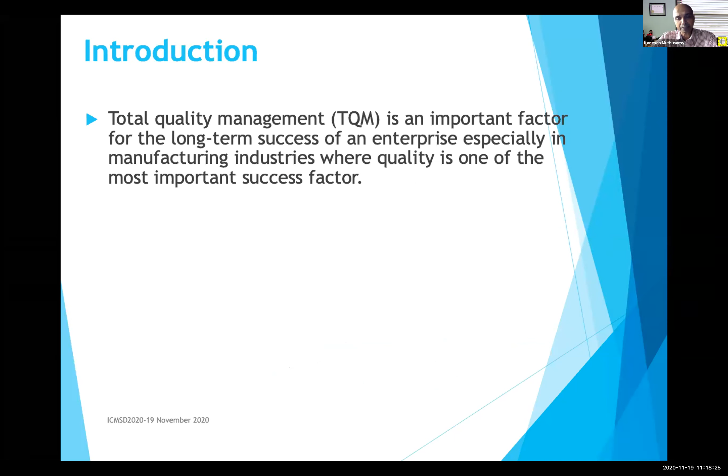As all of us already know, total quality management is an important factor for long-term success of an enterprise, especially in manufacturing industries, where quality is one of the most important success factors. Without quality, it is very difficult for us to sustain in the industry. This keynote talk attempts to present a list of TQM principles adopted by various enterprises for their operations excellence. These elements can be undertaken by any manufacturing organization striving for excellence. If you want to achieve excellence, then we have to adopt some form of total quality management.

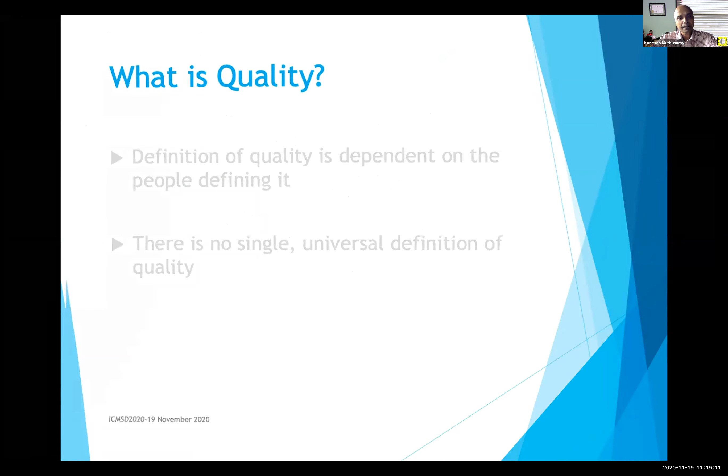Before we proceed, we must understand what is quality. Quality is not something that can easily be defined because it depends on the people who are defining it. There's no single or universal definition of quality. And there are 5 ways we can define quality. Number 1 is conformance to specification.

When we talk about materials, even manufacturing, we have a lot of specifications. So if a customer wants to accept our product, he has given certain specs. So it has to conform to the specification. Does the product or service meet targets and tolerances defined by the designers? Because it will be in the drawings. So that's a form of quality definition.

Another quality definition will be fitness for use. It evaluates the performance for intended use. For example, we compare a car, maybe Maruti and BMW. Both move a person from A to B destination. But the price will be different. But it is fitness for use. It serves the purpose. So if we have a little money, then we go for Maruti, and if we have a lot of money, we can go for BMW.

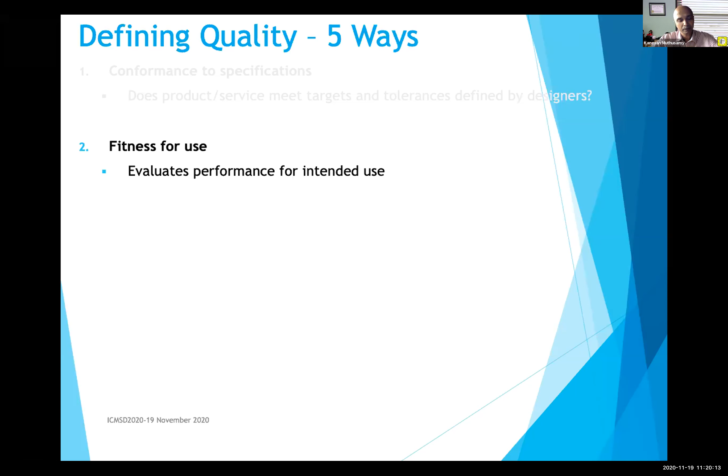Value for the price paid. We can evaluate the usefulness versus price paid. In my example of BMW and Maruti, we can see that we can pay a higher price for the same value of traveling. But in terms of comfort and elegance, of course, the BMW will be different to us.

Support and services we can also measure as a form of quality measurement, where it is the quality of support after sales. Normally people will look at the after-sales service, whether we are getting the right service after we acquire the system or the item. And that will determine the quality of the product.

And finally, psychological: the ambience, the prestige, the friendly staff. You know, when you go to any car showroom, the way they present themselves will give us some kind of psychological influence in terms of the quality of that particular product that we're going to acquire.

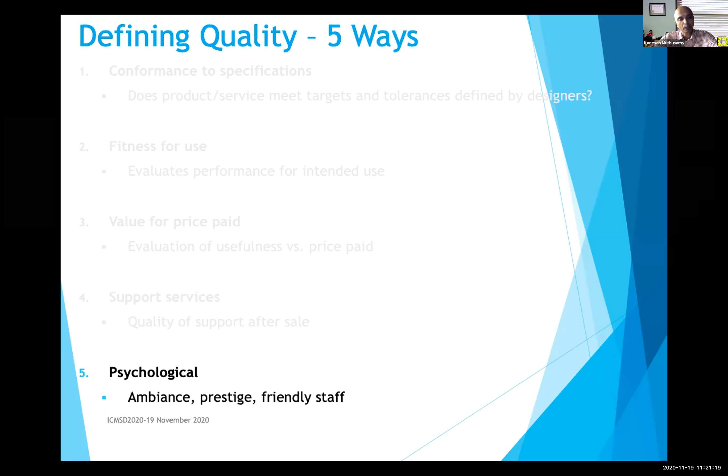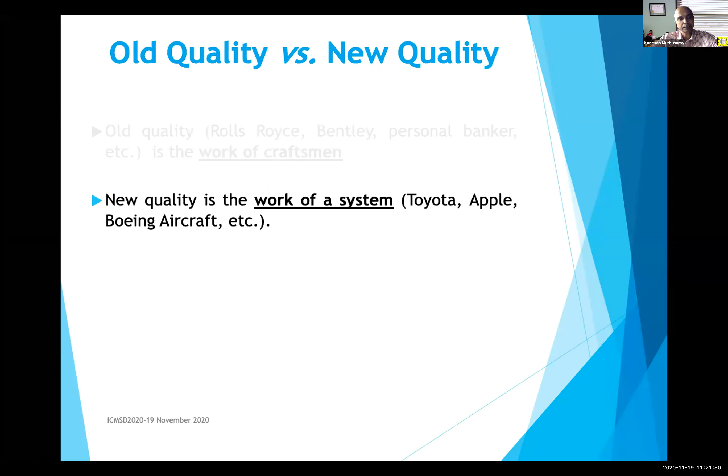We can compare the old ways of quality and new quality. The old quality, for example, like Rolls-Royce, Bentley, or a personal banker, is the work of craftsmen. They're very specialized. The new quality is the work of a system, like Toyota, Apple, or Boeing aircraft. They adopt the new quality as the work of a system. The beauty of the old is very expensive, made for the few, uses skilled hands, and is beautifully and functionally based, which is difficult to reach all the people.

Whereas the new quality reduces cost, is made for the many by intelligent minds, and should drive the economy and make business more competitive. For example, our previous guests talked about producing materials which are cost effective and can be used by various industries. And this can only be done by the new quality, not by old quality. Old quality only caters for the few because it is custom and will be very expensive.

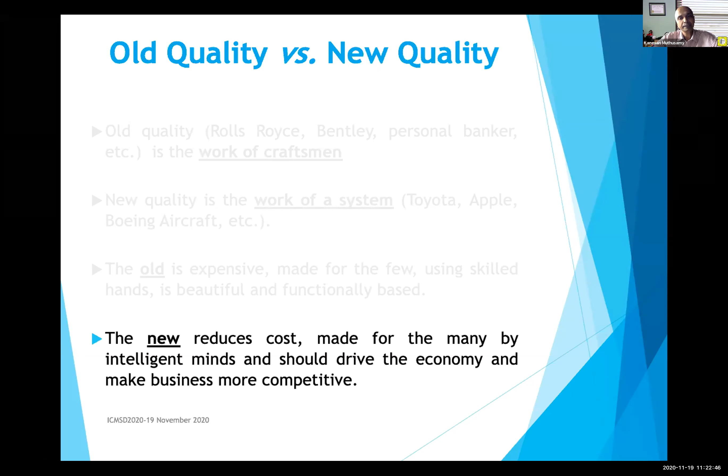We also can define quality for manufacturing, which is a theme of this conference, and also for service quality, because service is another form of production, because we have to deliver some services. Manufacturing quality focuses on tangible products, for example, conformance, performance, reliability, features. This comes under manufacturing. So you'll be measured against the conformance of the product, the performance of the product, the reliability of the product, as well as the features. So this is a form of quality in manufacturing.

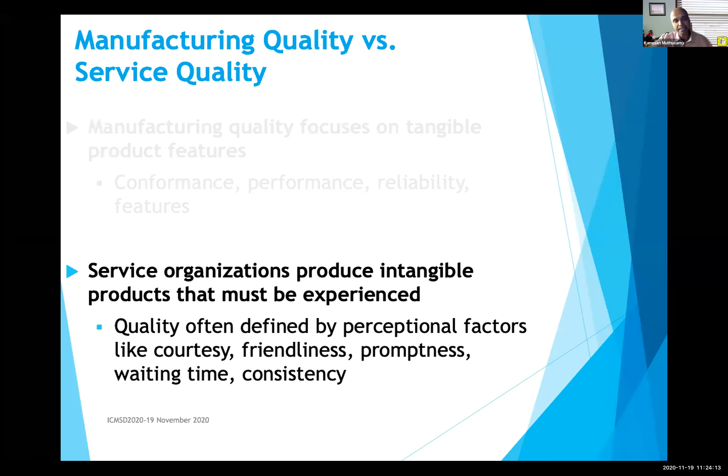Whereas in service organizations, it is more intangible products that must be experienced. This is very qualitative in nature to judge the product. For example, quality is often defined by perceptional factors like courtesy. We go to a hotel or restaurant, so we are looking at courtesy from the staff who's receiving us, the friendliness, the promptness, waiting time, and consistency. All those are actually intangible. It's difficult to measure. For example, you go to McDonald's, you need to have consistency to get the same service every time you visit them. Or you go to Saravana Bhavan, you get the same consistency, because there is a certain form of a process, a flow chart, to maintain the consistency of their services.

When we talk about quality, we must talk about the quality gurus. There are a number of gurus that promote quality. Shewhart proposed statistical process control charts, which are an integral part of any manufacturing facility. Dr. Deming proposed PDCA as well as 14 points for management. And I will cover Dr. Deming later in the next slide, because he can be considered the father of quality management.

Dr. Juran proposed cost of quality, and Crosby talked about quality is free. That means we don't need to pay any money to achieve quality. It's actually zero cost to achieve quality. As well, he promoted zero defects. Ishikawa advocated the fishbone diagram as well. He assembled 7 quality control tools, which are widely applied in the manufacturing industries. And finally, Dr. Taguchi advocated design of experiments, and there are experiments by his name, Taguchi methods.

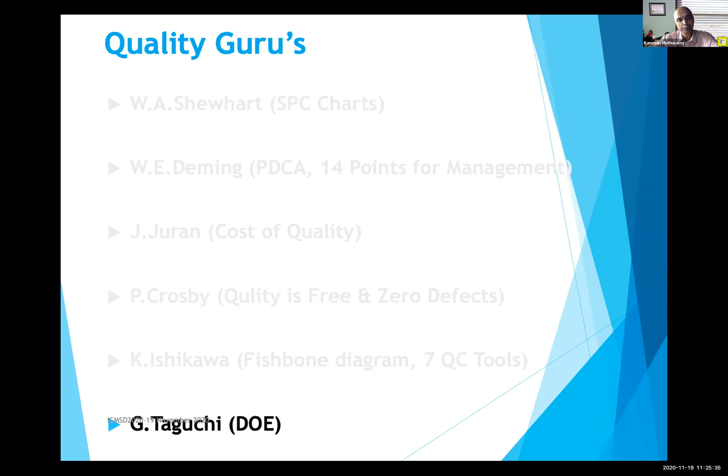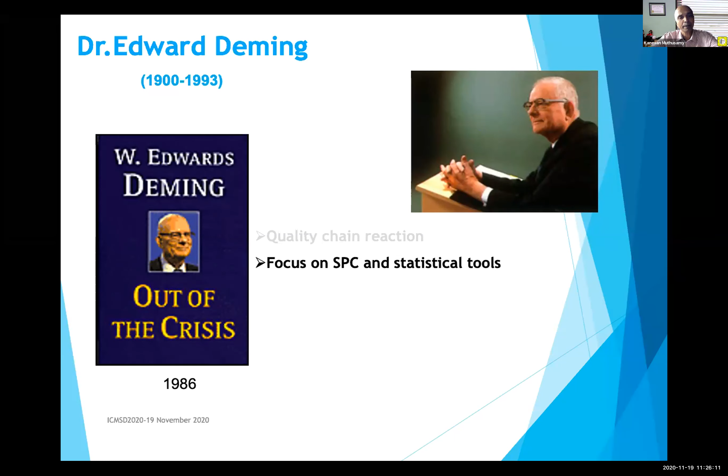Dr. Deming lived in the previous century. He's actually the father of quality management, and he advocated the quality chain reaction. Every action got a reaction, and I will cover this quality chain reaction in the next slide. He also focused on SPC, or statistical process control, and other statistical tools to manage production or manufacturing. And he also proposed 14 points for management for sustainability. As well, he advocated the PDCA method, which is very important for continuous improvement.

And the highest quality award in Japan is named after him, the Deming Prize, because he was one of the persons instrumental in developing Japan's quality system after the Second World War. And he's the one who transformed the way the Japanese do things compared to those days.

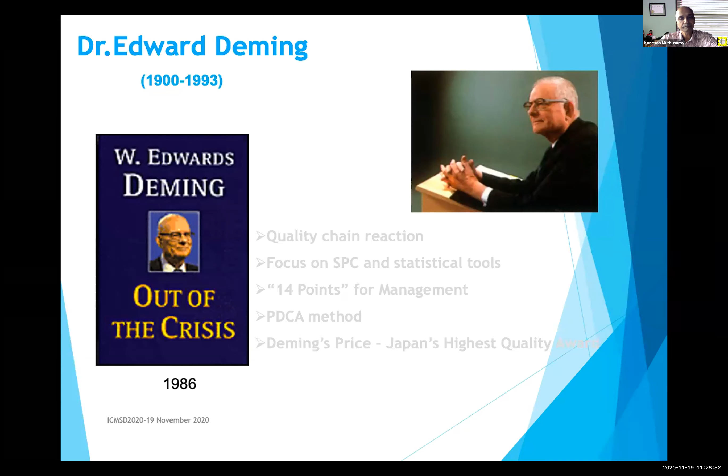Whereas when your product quality is good, you can satisfy the customer. The customer is extremely satisfied. Like Apple products, they're expensive, but the customer is very happy because of the quality. And when you have a happy customer, they tend to buy more of your product, and this will increase your market share. When your market share increases, you will have increased profit.

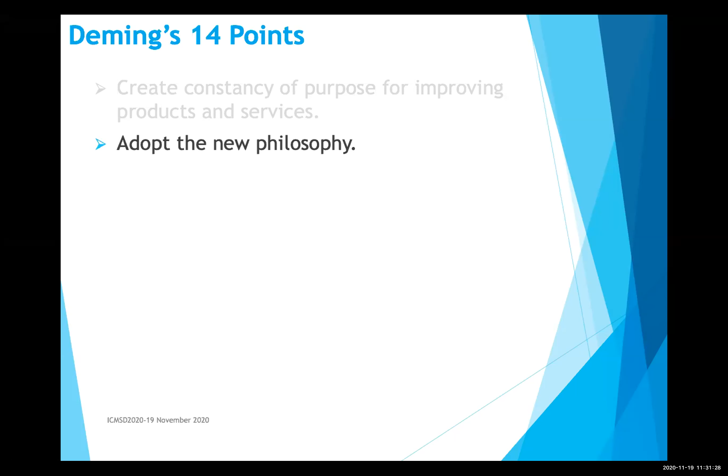Cease dependence on inspection to achieve quality. That means you don't depend on inspection to ensure quality. You must do it right the first time so that you don't have to re-inspect again and again for the same part. And this is very common when we don't have trust or assurance in our manufacturing process.

We tend to put a lot of inspection stations. We are afraid the defective product will reach the customer. And this is actually a redundant process, which will increase the cost of your manufacturing. So Deming says, cease your inspection, build quality in people as well as in the process.

End the practice of awarding business on price alone. That means you don't buy materials or machinery on price alone, because when you pay a cheaper price for any material or machinery, you will not get good quality unless you can work with the supplier. What he says, instead, minimize the cost by working with a single supplier. You should treat your supplier as a partner, not as a vendor.

I worked for an American organization. We treat suppliers as our partners, not as a supplier, because without them, we won't be able to produce our product. So they will be involved even in the proposal stage, because all our suppliers are registered vendors and they are our partners. And they need to survive so that we also can survive.

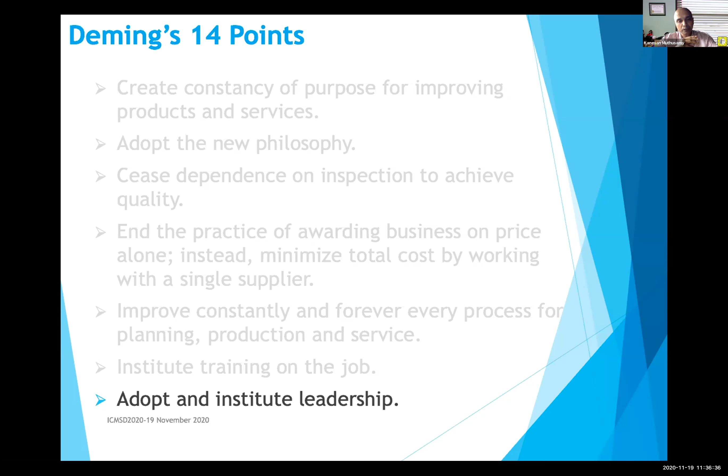Drive out fear. That means don't instill fear on employees. It has become a very normal culture to put fear on employees. We have a lot of rules and regulations.

We don't empower them. I worked for an organization with 5,000 employees. There's no attendance, not only for the managers and engineers, but also for the operators. No attendance, because they trust the employees. When I asked my manager how it could be possible without attendance, without a punch card or even a barcode, how can we ensure 100% attendance and productivity?

He says, when we hire, make sure that we hire the right people. That means we don't hire by paying lower salary. We hire them for the right skill, the right knowledge, the right price. And they have to go through a few stages of interview. So we almost have filtered all the unwanted candidates. So 98 to 99% of the employees will be good.

There'll be 1 or 2% escapees who somehow came into the system. During the 6-month or 12-month probation, we can evaluate them. But sometimes even the managers miss it during that probation, and they'll show their true colors after confirmation. So what we do is isolate them, counsel them, retrain them. Why should we punish 99% of the people because of this 1% bad apples?

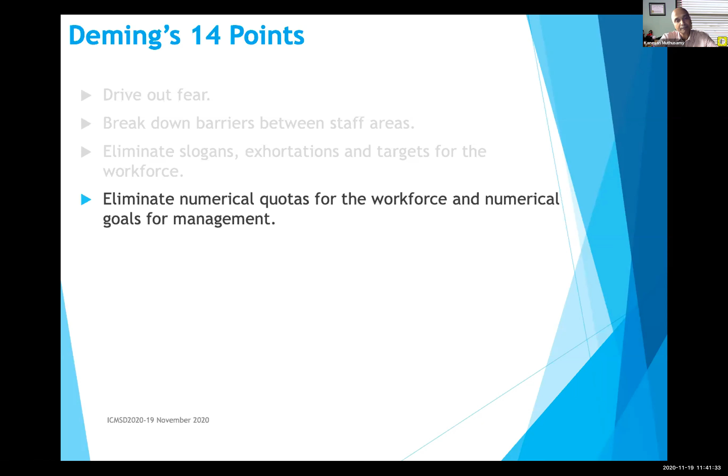Remove barriers that rob people of pride of workmanship, and eliminate the annual rating or merit system. Sometimes we have a 'best employee of the month' or 'best employee of the week'. When you do this, you're actually telling the other 99% of employees that they're not good for that particular week. We shouldn't have this kind of rating system, publicizing the best employee of the month or week, because it derails the spirit of teamwork.

Institute a vigorous program of education and self-improvement for everyone. Encourage staff to acquire higher education while they are working. Provide and encourage them to acquire certificates or special skills, and you can also fund them.

Many countries have special programs. In Malaysia, we call it HRDF, Human Resource Development Fund, where each enterprise must contribute 1% of the salary of the staff into a pool of funds, which the organization can use to send employees for training and to acquire higher education. This is one of the ways in Malaysia we ensure companies encourage education and self-improvement for employees.

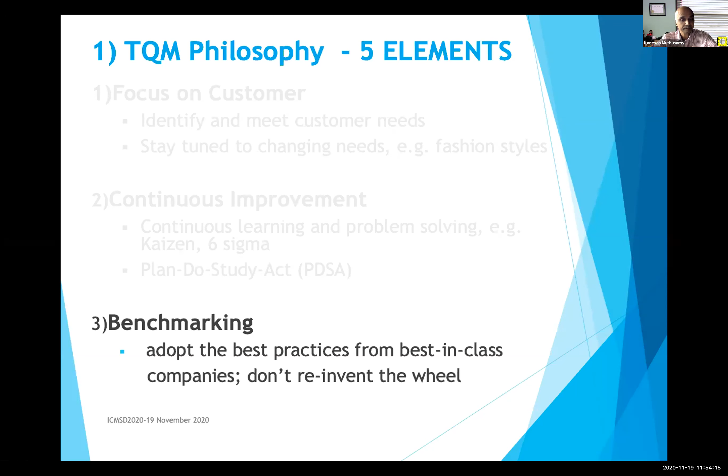Fourth philosophy is employee empowerment—you empower all employees, trusting them, both external and internal customers. It's very important to satisfy customers within internal organizations. Internally we have internal customers; for example, we have many departments. The HR department is supposed to serve the people in the company, and the purchasing department is supposed to serve the people in the company to buy goods and materials. You must satisfy these internal customers so that the manufacturing or other departments making the product are able to satisfy the external customers who pay our salary or income. Without satisfying internal customers, it's very difficult for people in the company to satisfy external customers. We always think we are one company and don't have to satisfy internally, but there's a lot of politics that goes on within the company—backstabbing, office politics.

This is not good, because when you have this problem, how is the organization able to satisfy the external customer in terms of cost, scope, and time to deliver the product—the triple constraints in project management: cost, scope, and time? It's very important to achieve internal customer satisfaction so that we can satisfy the external customers who actually give us the money by buying and supporting our product.

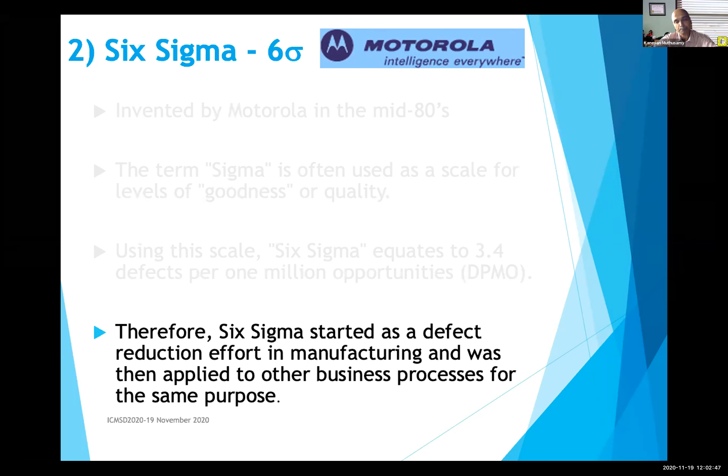Okay, let us see how we can translate this into numbers. So therefore, Six Sigma started as a defect reduction effort in manufacturing, and was then applied to other business processes for the same purpose, including the service industry.

We look at these numbers on the scale. Normally, any organization, when they start new, will be somewhere around 1 to 2 sigma, which is about 70% good, with the rest, about 30%, being bad or defects, because you still have to make some money. Then you should elevate yourself to 3 sigma, which is about 93.3%, considered good for some industries. Then 4 sigma, which is 99.38%, then 5 sigma, which is 99.977%, and then 6 sigma, which is 99.9997%, equivalent to 3.4 defects per million opportunities.

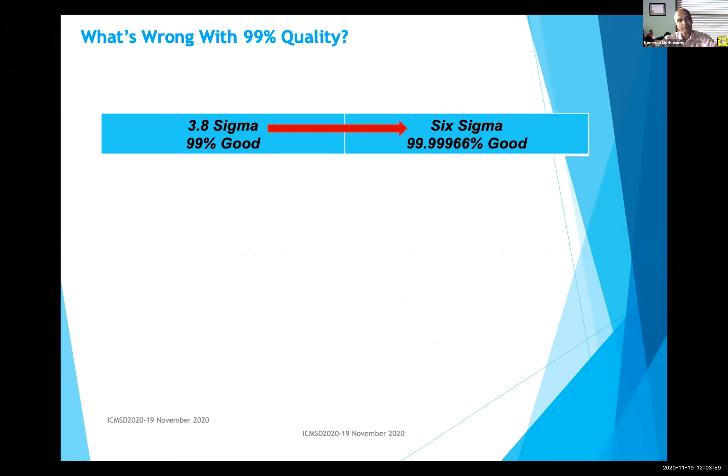Okay, you may ask me, sir, what's wrong with the 99% quality? Let us compare. 99% good is a 3.8 sigma, whereas 6 sigma is 99.99966% good. If we are 3.8 sigma, there are 20,000 articles of mail lost per hour. Whereas if you are 6 sigma, only 7 articles lost per hour. So 20,000 to 7.

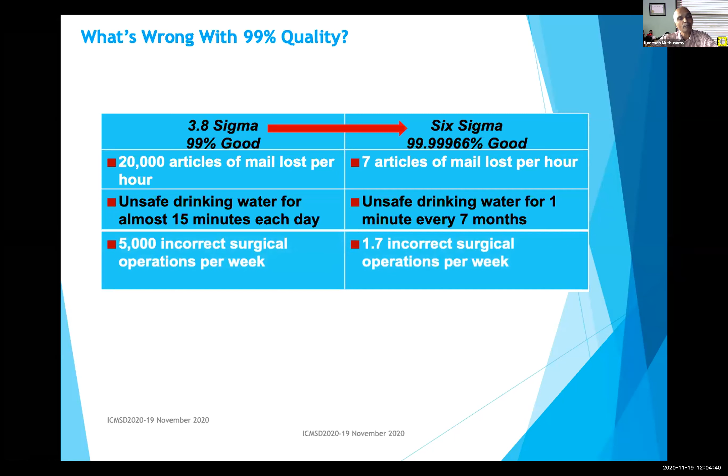Unsafe drinking water for almost 15 minutes each day if you are a 3.8 sigma. But if you are a 6 sigma, unsafe drinking water for 1 minute every 7 months. Way apart. 5,000 incorrect surgical operations per week. When you go to hospital, you go for surgery. If you are a 3.8 sigma, there are 5,000 incorrect surgical operations, average around the world, per week. But if you are a 6 sigma, only 1.7 incorrect surgical operations per week.

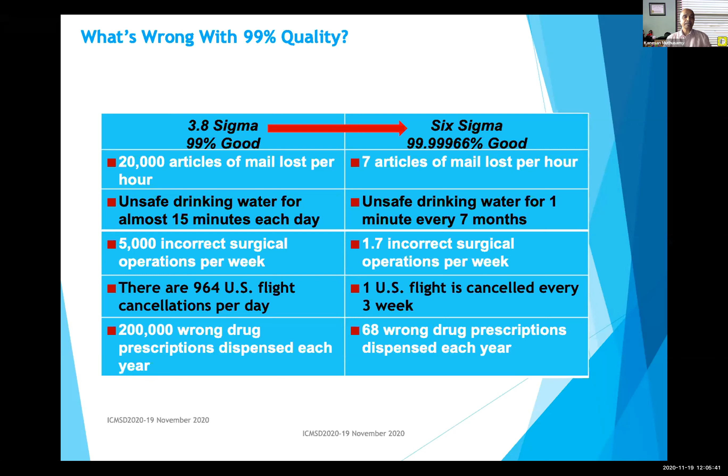There are 964 US flight cancellations per day under 3.8 sigma, which is 99%. Whereas 1 US flight cancels every 3 weeks under 6 sigma. 200,000 wrong drug prescriptions dispensed each year. When you go to a pharmacy, when you buy a medicine, if you have a 3.8 sigma process, you have 200,000 wrong drugs prescribed. Whereas if we are 6 sigma, 68 wrong drug prescriptions dispensed each year. So you can see the difference between 99.996 compared to 99%.

And you may ask me, are there any organizations that have already achieved 6 sigma or beyond? Yes, there's one organization in the country where this conference is hosted. Let me share the company name. It's a 6 sigma organization. There's no known or documented organization that has reached beyond 6 sigma level of quality anywhere in the world except the Mumbai Dabbawalas. I'm very sure you have heard of the Mumbai Dabbawala. It is actually a tiffin carrier company in Mumbai. And they have attained 1 defect in 16 million transactions, which is about 6.7 sigma, if you calculate.

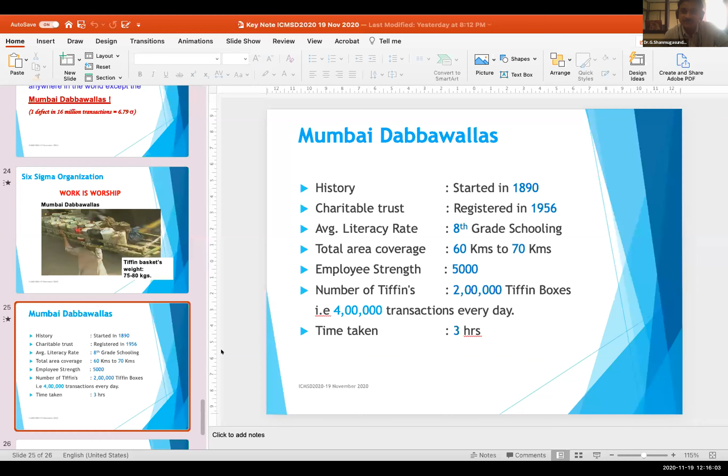Yeah. Thank you, Kannan sir. Thank you very much, sir. Thank you, doctor. Thank you, sir. Now, the screen is visible. Okay, okay.

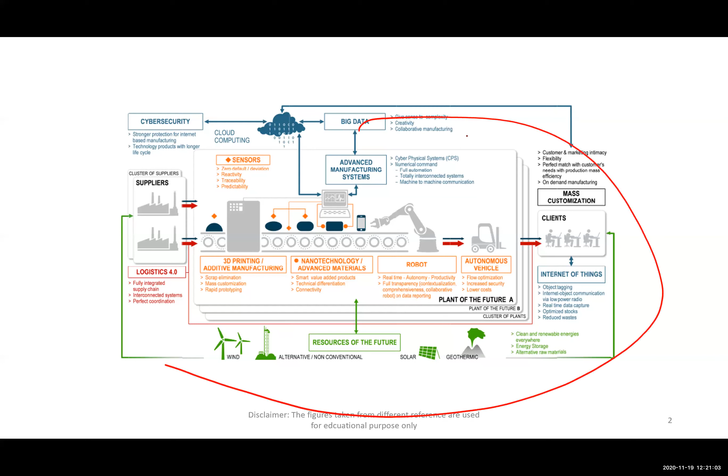In this Industry 4.0 layer, additive manufacturing is going to play a major role. Just to give you an overview, nowadays, in many cases, shop floors are shrinking, so that you have the flexibility to go ahead with a customized product. One example is the replacement of hip and knee joints. Earlier, hip and knee joint replacement was very difficult because getting customized structures has its own intricacies. Whereas with the recent advancement in 3D printing or additive manufacturing, we could reach a point where we can easily make customized structures based on different human body features.

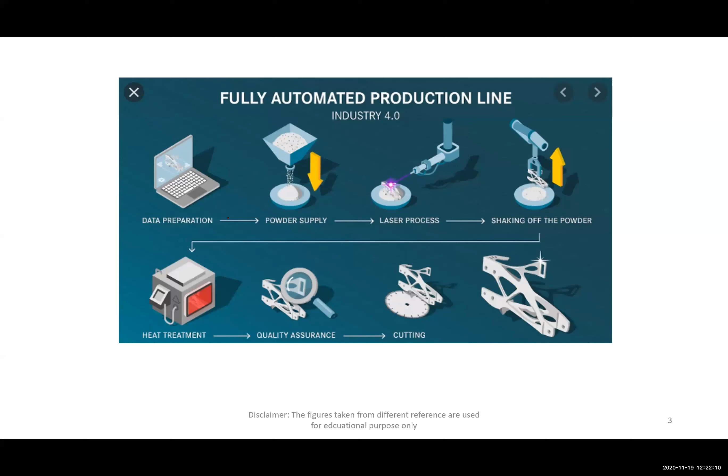Similar to this, there is one more area which I would like to talk about, which is called smart materials. These smart materials have potential applications in actuators as well as sensors. This is just to give you an overview of how flexible a laser is. These lasers have the capability that, for example, if you want to manufacture any kind of complex product, those complex products can be easily manufactured, and all the post processing can be done at the same level.

So now when we come back to smart materials. As far as smart material is concerned, these smart materials have a potential application in such a way that it has a capability to biomimic. For example, if I want to simulate my hand movement, hand and my limb movement, basically we will be integrating lots of motors under it to simulate a hand and a limb movement.

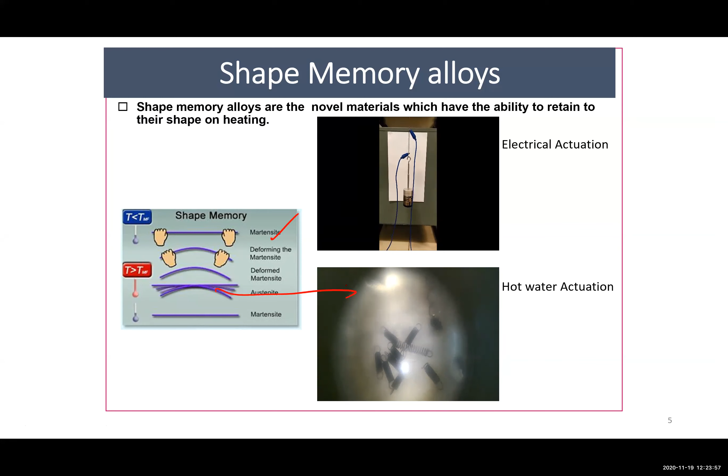If I look into the overall mechanism behind it, initially the spring is in the martensite phase, then you are deforming it. This is called deformed martensite. Now I'm putting it in hot water where you can see it is automatically taking up the shape. This is called the austenite phase where you are supplying heat to it, and finally when it is completely immersed, it comes back to the martensite phase. You can see how responsive it is. At an instantaneous time, it can come back to its shape.

These are quite interesting materials which have their own application towards sensors or actuators in an advanced manufacturing scenario. To give you an overview, these materials are called programmable materials. The main advantage is these materials can be programmed to any shape and recovered to any shape. These are some of the training methods employed to program these materials and to achieve a shape.

As far as shape memory effects are concerned, there is a wide variety of shape memory alloy materials available. Among these, nickel titanium and copper based shape memory alloys are widely used for commercial applications or for experimentation. Nickel titanium based shape memory alloys work in a window of around 80 to 130 degrees Celsius, and copper-based shape memory alloys work in a domain of around 250 degrees Celsius. Both these windows are employed in industry so that you can pick it up for your own applications.

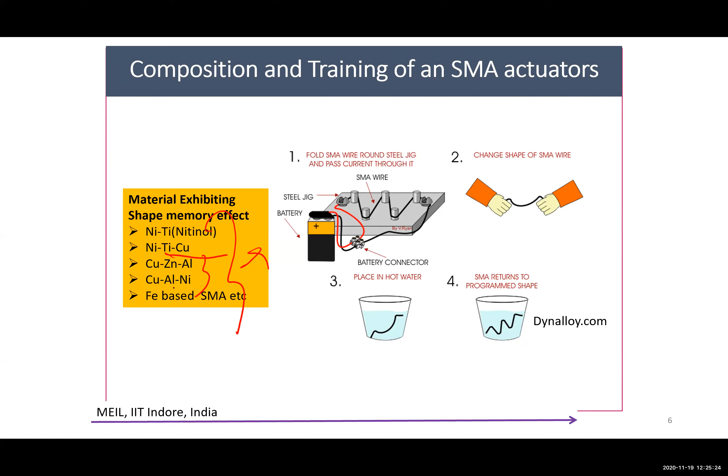So now in this talk, we will be discussing how lasers and shape memory alloys are being used for different levels of advanced manufacturing. In fact, these are some of the case studies which we have done in our laboratory for different industry levels, capturing these advanced manufacturing systems.

If I look into the challenges of shape memory alloys, there is a wide variety of challenges involved. One is tedious training. Another interesting one is, if I change the composition, how does it behave? That is almost a million dollar question, and people are probing into it to see its structural behavior. For almost 10-15 years, people have been working in this particular line to get an overview of the variation in the composition of the shape memory alloy structure.

The third important concept is related to thermomechanical behavior. Any material you take, failure is going to happen. So if failure happens, we are there to study the failure and give an overall picture of how the failure is happening and how to overcome it, so that this gives you an idea of how you can use the material further along.

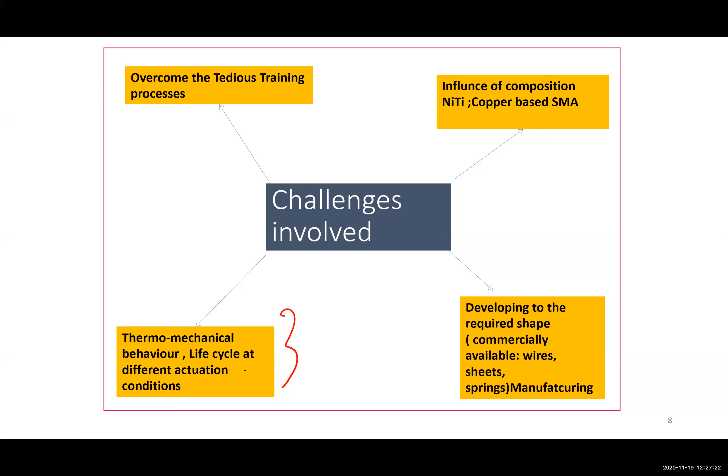For shape memory alloys also, there are some mechanisms which are available to study the thermomechanical behavior. So we have also attempted some kind of thermomechanical behavior analysis, which I will be explaining. And the most important thing is, as far as shape memory alloy is concerned, commercially you get the shape memory alloy in the form of wires, sheets, or springs. So as an alternative approach, what we thought is, since we have a laser in hand, why can't we use laser-based additive manufacturing to make customized shape memory alloy structures for different aspects?

So our first case study is we want to use the shape memory alloy as a tool for Industry 4.0 or smart manufacturing. For that, we have built customized shape memory alloy structures using laser additive manufacturing. Okay. So the motivation behind my work is this. This is an Industry 4.0 environment.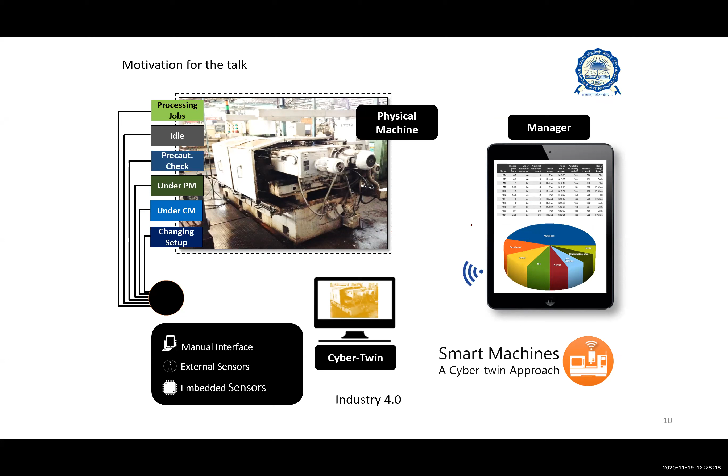Basically, this is a pretty old machine which is available in one of the companies, which was started in the 1970s. With recent advancements, obviously the company is not ready to shred the machine. So instead, we thought, why can't we modernize that machine? Since it is from the 1970s, we need to integrate some kind of sensors in it, so that it becomes intelligent. When it becomes intelligent, it starts communicating to the manager app. Basically, we are trying to mimic the complete machine in a digital platform, which we call a cyber twin.

This cyber twin is nothing but whatever performance the machine gives. The entire performance is studied using the cyber twin system, so that the cyber twin will check the performance. We can get the data of the performance at each and every level. And most importantly, the concerned manager can observe the detrimental effects happening while running the machine. For example, when your machine is going to fail, you can easily identify it. So this is one such arrangement.

What we have made over here is, we have a spindle connected to a column. For example, let us consider this as a drilling machine. Before this drilling machine fails, first the tool will wear out. Once the tool wears out, there is going to be a vibration or chatter which gets developed. Because of the vibration, a huge amount of heat will get liberated in this particular region. When that heat is liberated, obviously the next step is the failure.

Since I have a material which can respond to heat, and not only does it respond to heat, it can also be used for arresting the vibration, or it gets actuated with respect to heat. So we have made a spindle kind of arrangement. In this we have kept the shape memory alloy deposited tool holder, which is in the form of a ring, and this is the focusing optics, which is mainly meant for capturing the data.

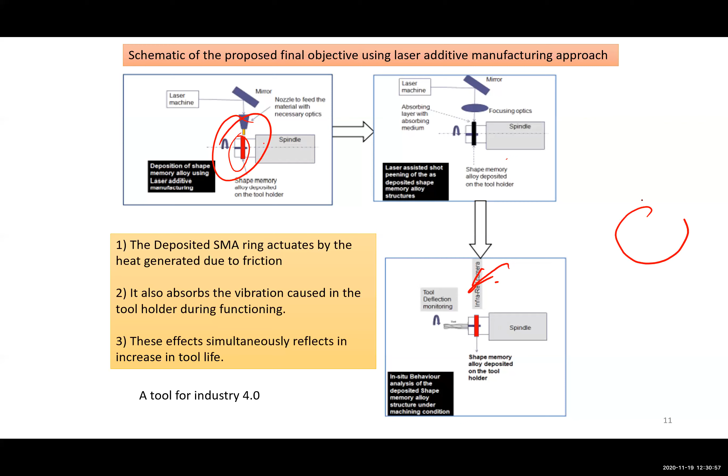So basically, the major challenge in front of me is I need to make such shape memory alloy based structures. For that, I'm opting for a laser additive manufacturing system. This is called a fused deposition system.

So this fused deposition system is available next door. There is a Centre for Advanced Technology called RRCAT. It's a part of the Department of Atomic Energy. In fact, this machine was built by them.

In this machine, what they have made is a nozzle, which we call a coaxial feeder nozzle. Let us consider I am using nickel titanium powder. Nickel I am feeding through this path, and titanium through this path. Here I am using focusing optics where the powder is fed in, and the powder is fused because of the focal point generated over here.

When the focal point gets heated up, you can manipulate this to get the structure. In fact, this is the complete system we have used, and this is the coaxial feeder we have kept.

Through these coaxial feeders, the NiTi powders are being filled. Most important, this is your glove box kind of arrangement. In this glove box, we have filled argon, and we have used a 2 kilowatt fiber laser system fed into it. This laser system is well focused so that it will fuse the material, and when you manipulate the material, you can build the structure.

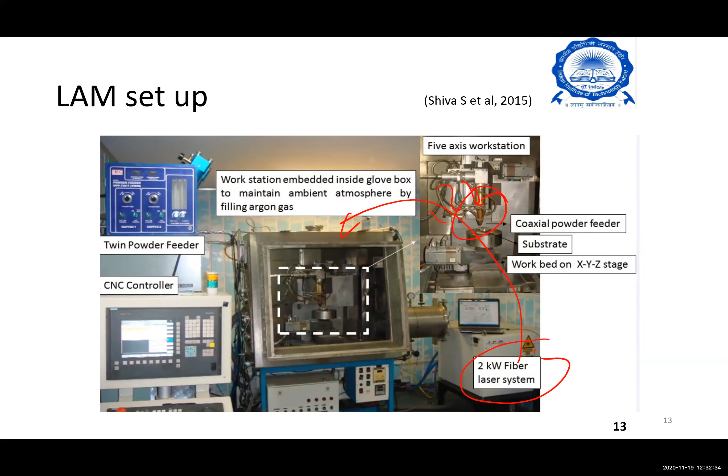So the idea is that we have completely fitted the system in a CNC stage, so that it is easy to build any kind of structure. So this is the structure we have built.

We took a small titanium plate, and over this titanium plate we deposited the shape memory alloy structure, in the form of a ring. We cut this ring using a wire EDM so that it can be easily fitted into the collet which I have shown.

But here the major challenge I am facing is that I am starting from scratch. It is a challenging job to create a customized structure out of it. In this customized structure, I have a titanium substrate.

The major parameters which affect my structures are the wettability. In order to have control over the wettability, I need control over the laser energy and the aspect ratio I am trying to employ.

So what I have done is change the different parameters and go for different aspect ratio geometries, and these aspect ratio geometries were well connected. Then we did a complete scanning electron microscopic analysis.

We went for different combinations and fabricated these structures in an optimized way, and went for detailed characterization systems. Some of the characterization includes scanning electron microscope analysis.

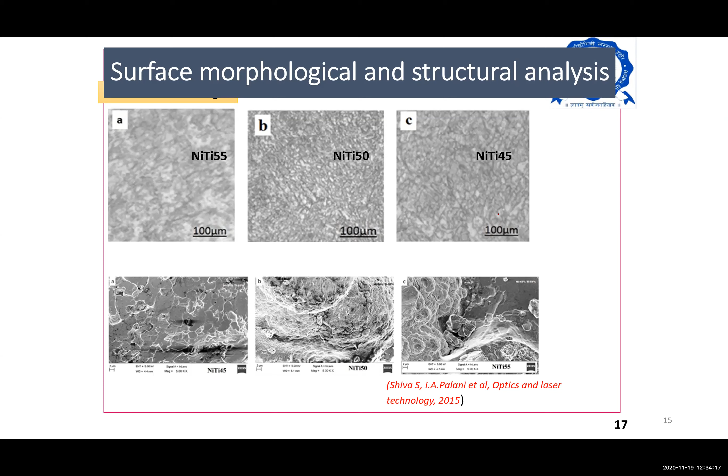In this scanning electron microscope analysis, we studied the structures, and then we also studied the mechanical properties in detail. As far as mechanical properties are concerned, we were more concerned about the ductility and about the hardness imparted on the surface.

The most important parameter is the shape memory alloy property, because unless you have the shape memory alloy property, it is not going to sense, nor is it going to actuate.

In order to ensure the shape memory properties, the shape memory property is basically ensured using these B2 phases. With these B2 phases, it is easy for me to ensure the shape memory alloy property, which is available over here.

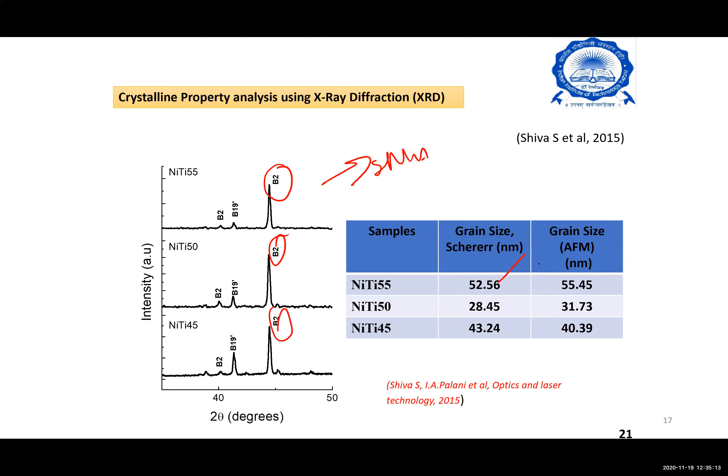This availability has been checked with respect to an XRD analysis, which gave me clarity about the grain size, through which we could estimate the grain size, and we compared it with the AFM. This is another important characteristic called DSC, differential scanning calorimetric analysis.

This differential scanning calorimetric analysis basically gives me a picture about the phase transformation, because if you look into the major physics behind this, there is an austenite phase and a martensite phase available. As far as these phases cater to my actuation property, it is well taken care of, which can be characterized using a differential scanning calorimetric analysis.

So for that, we went for two different kinds of arrangements. One, we took a commercially available system. From that commercially available system, we took the DSC and XRD analysis and compared it with the as-fabricated system.

We observed that almost similar fashions were observed. The next stage is that we want to impart or improve the property of it. So for that, we went for some concepts called laser shock peening and laser annealing, because in additive manufacturing, I had a metal powder.

I'm just melting that metal powder and manipulating it. When I melted and manipulated my metal powder, obviously there was going to be a certain amount of defect involved. Some of the major defects we observed were random crystallization.

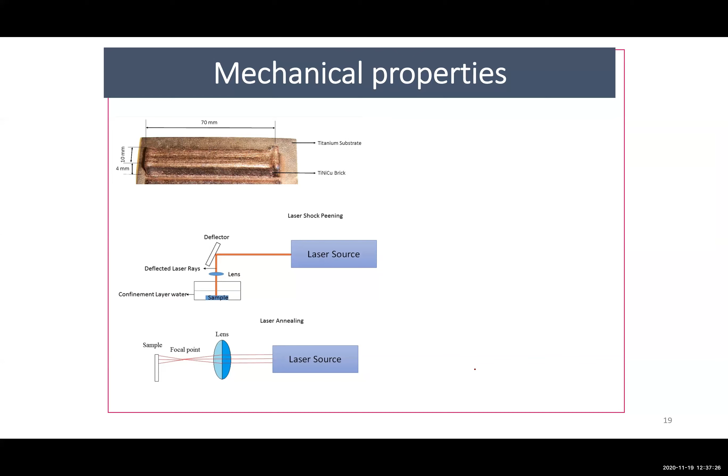This is what we tried, and we also tried to incorporate - earlier we were working with nickel titanium, basically a binary alloy. Then we moved into the ternary alloy, where we introduced copper and tried to look into the overall behavior of the system.

This is the laser shock peening arrangement we made. In this laser shock peening arrangement, here you have a sample. The sample is being immersed in an underwater condition.

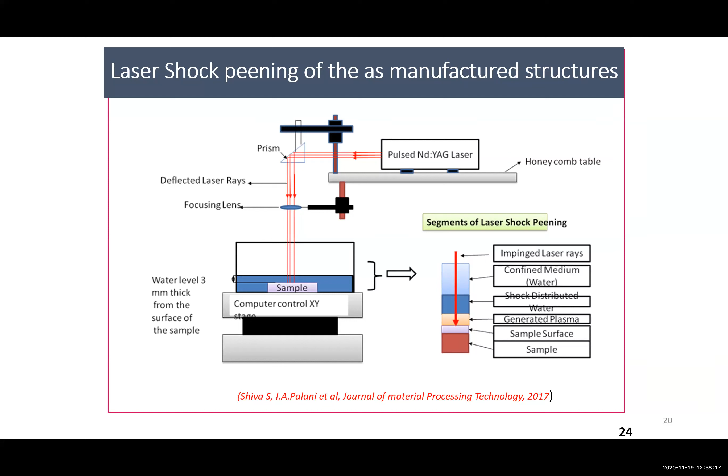This is one of the laser shock peening concepts which we have imparted on the sample, which is a kind of post-processing we have employed. This is a ternary alloy based system which we have done.

We also did a complete detailed characterization, including scanning electron microscopy and DMA analysis, basically in order to study the storage modulus capability in detail. With respect to the storage modulus capability, we could study the austenite phase and the martensite phase, and the mechanical correlation with respect to their behavior.

The most interesting thing is this was highly helpful for us to map with our system and directly use it in the production field.

The next case study I would like to discuss is called laser forming, which is a kind of die-less manufacturing. Formability - we all know that if I want to form any kind of sheet, basically you require a punch and a die.

The cost of the die is sometimes quite heavy. This case study was done in collaboration with a company involved in manufacturing brake pedal and clutch pedal based prototypes for a different industry. To make a prototype, they need to make a die, and even for variation in angles, they need to change the die. So the die cost was quite heavy, almost around 1 lakh. That's how the problem came into our mind.

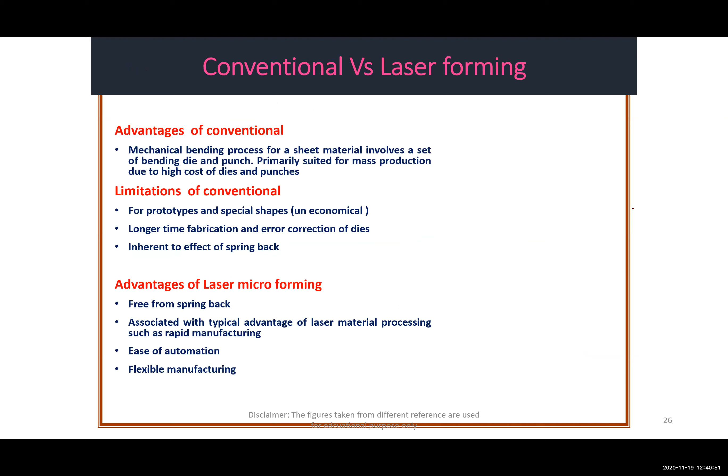So we thought of going for laser forming. The laser forming has an advantage where you don't require a die, you are just trying to use heat over the surface. This is a very good example of how laser forming is being employed.

For example, I have a sheet metal where I need to have a bending. The laser is made to irradiate on the surface. When the laser irradiates the surface, there is going to be an expansion and contraction. Like any metal, when you try to heat it, there is going to be an expansion, and when you cut off the heat, there is going to be a contraction. Here I am using a laser.

Since I'm using a laser, it's a kind of localized heating. When localized heating is employed, there will be an expansion at the localized heating spot and a contraction after the cutoff of the heat. When you try to apply a constraint to it appropriately, you can achieve a bending, and this bending will be employed over here. So this is the overall arrangement.

With laser forming, you can go for different operations like upsetting, forming, bulging, etc. These are the different operations which can be formed with laser forming. It is well correlated with the mechanical analogy, where you can do a bending, an upsetting, and a buckling mechanism.

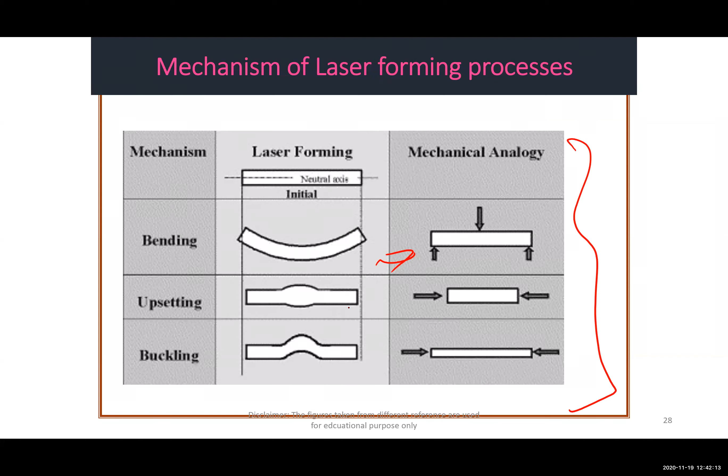This is the mechanism of bending, which I explained earlier, where you are trying to impart heat. When you impart the heat, there is going to be an expansion and contraction, and with respect to this expansion and contraction, there is going to be a bending which will be taken care of. There is a video on laser forming which I will show at the end after the presentation.

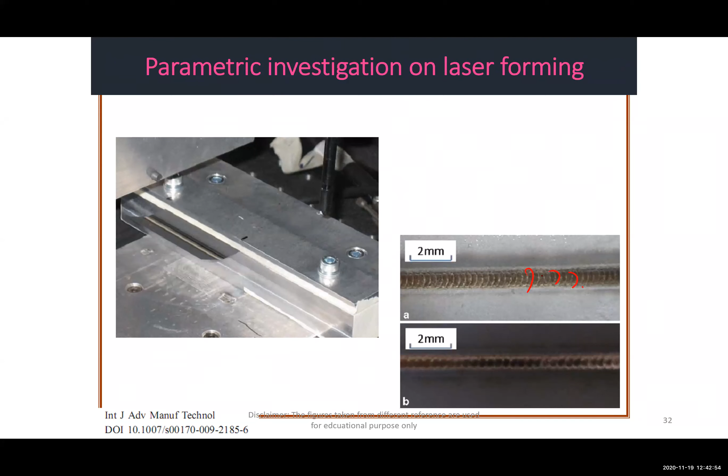The idea for our case study is basically to go for die-less manufacturing. The parameters involved in this kind of laser forming are basically your scan speed, your overlapping region, which is well deployed here, the thickness of the material you are using, and the energy you are imparting on the surface.

This is what we are trying to work upon. The idea is we want to make brake pedals and clutch pedals, basically a prototype version, using this laser forming technique. The company wants to incorporate a flexible level such that the operator, once he feeds the thickness of the material, the type of the material, and the bending angle, automatically the different laser parameters come out. For that, first we have to do a huge amount of trials.

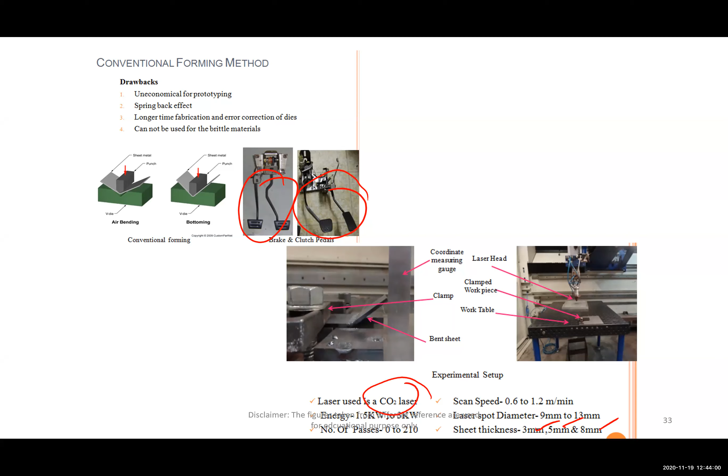So that is what we did. We went for different materials with different thicknesses ranging from 3 mm, 5 mm, 8 mm, and even 10 mm. We used a carbon dioxide laser with energy of 1.5 kilowatt to 3 kilowatt. We varied our passes from 0 to 210, with a scan speed of around 0.6 to 1.2 meter per minute, and a laser spot diameter of around 9 mm to 13 mm.

So we went for a complete wide sweep. In fact, we did the results in such a way that we went for a variation in thickness, something around 3 mm, 5 mm thickness sheets. And these 3 mm, 5 mm thickness sheets were well correlated. And we changed the spot dia as well as the bend angle. And that is, we scanned our power.

So when we try to scan our power, we could see a complete wide spectrum of bend angle as well as the scan speed as well as the bend angle, which we took as an input, and we went along the detail analysis. So in fact, this is one sample which we have done with a 1 centimeter thickness sample. So in this 1 centimeter thickness sample, we are just passing it through a laser.

So when we try to pass through a laser, you have an unaffected zone, you have irradiated region, and this is your heat affected zone. So when you try to scan through a laser, obviously there is going to be a bending, and the major aspect, or I would say a major defect over here is, earlier we thought of employing this directly for the actual condition of brake pedal and clutch pedal.

But the major issue what we observed is because of the heat affected zone, when we try to go for a cyclic loading, a huge amount of failure was observed. So that is the reason we didn't want to go in that particular direction. So we almost restricted our application towards the prototype based system.

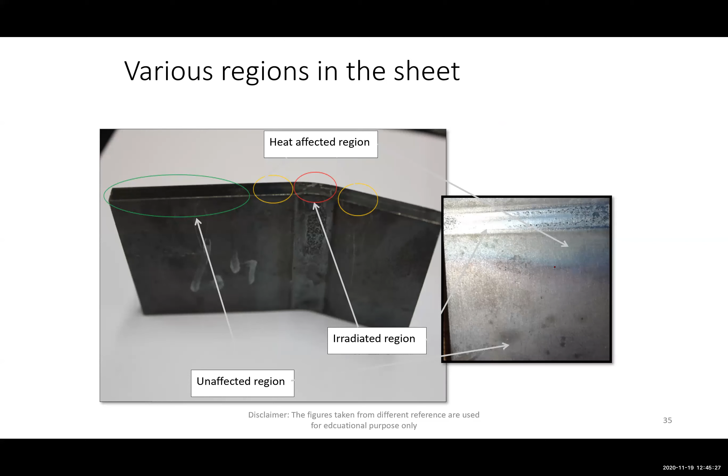Okay, so with respect to a prototype based system, since we are going for a detailed analysis, we went for a scanning electron microscopy. So basically, this is an unaffected region, this is an irradiated region, and this is a heat affected region, and this is an irradiated region at the top. And we also went for a complete mechanical testing.

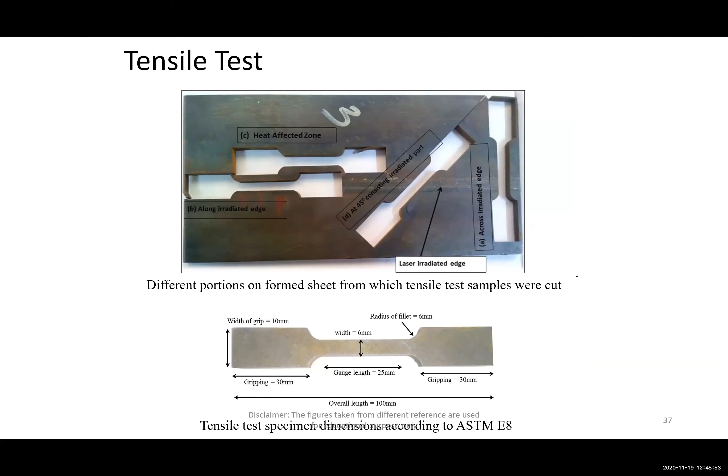So as far as mechanical testing is concerned, we went for a tensile testing where we made tensile testing samples at different points, and then we went for a complete mechanical analysis. So with respect to the mechanical analysis, we could almost segregate how much the mechanical property is getting improved. So this is the laser formed samples which we have done for the industry.

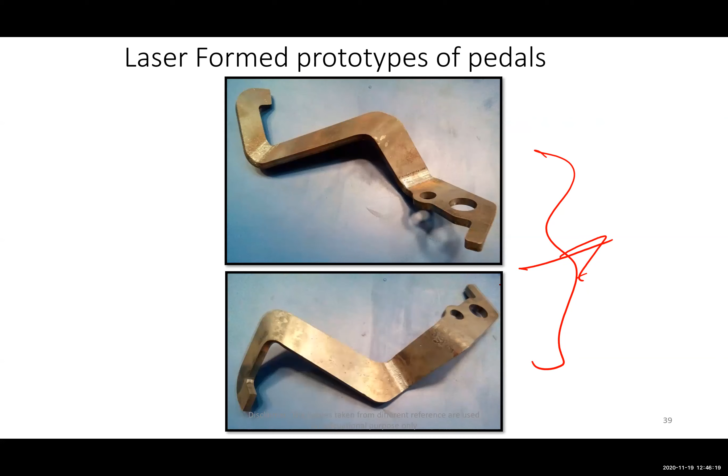Now we have extended this work for shape memory alloys, because with shape memory alloys, we have seen that when you try to deform it, there is a chance that when you try to apply heat, it comes back. So a similar thing can happen when you get a sheet, because the shape memory alloy is made out of nickel titanium. It has a potential application towards aerofoil structures.

Because in the case of aerofoil structures, like your engine fan, if it is intelligent enough, you can just tune your drag and the lift force. So when you try to tune your drag and the lift force, then it is easy for you to manipulate your inlet as well as your outlet.

So this is one of the collaborative projects with GE India, where they were involved in laser forming of these sheets. These sheets we tried to bend with a die, where some issues were observed. So we went for a laser forming, and we wanted to make some kind of corrugated aerofoil structure, which is slightly complex.

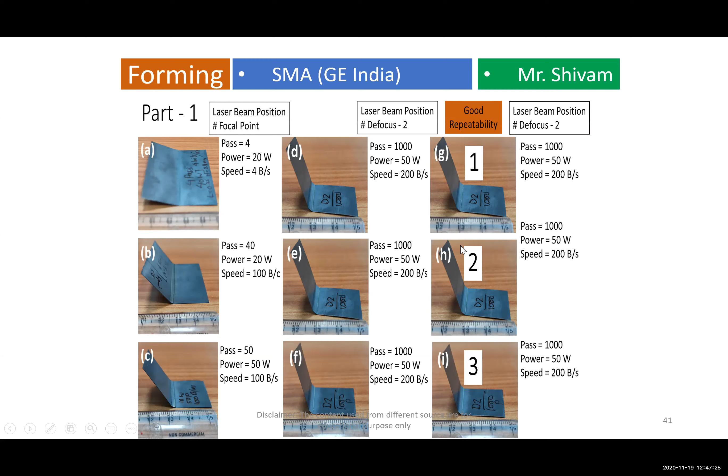So this corrugated aerofoil structure, we attempted with laser forming with a thin sheet of foil. In fact, we changed the fixture in such a way that we could get the aerofoil. This is the aerofoil structure which we have made with a flange kind of arrangement. And the interesting part is it didn't come back basically. There was a minor deviation, but apart from that, it retained its own shape memory property only to a certain extent, not in a conventional way.

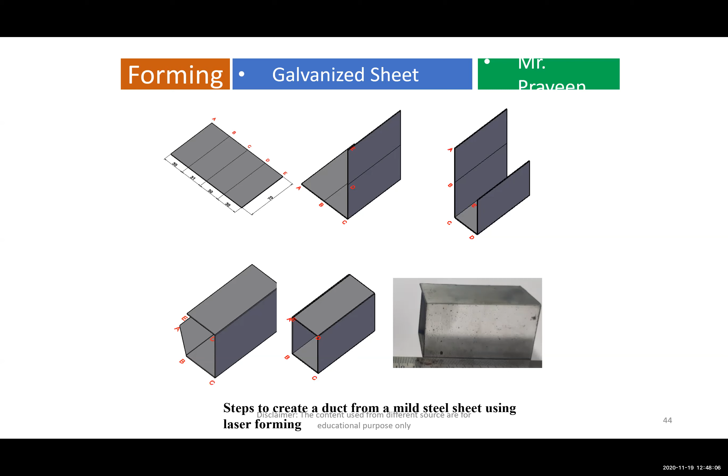Okay. So this is one project which we did with one of the automotive tractor companies. Basically, they want to fabricate their engine cabinets. So for engine cabinets, we made some kind of prototypes so that they have a flexibility to change their engine cabinets based on their requirement. So this is what we tried with them.

Okay. So the next case study which I would like to talk about is called a gripper. So basically, we were in the process of developing a gripper for a smart Industry 4.0 which deals with silicon wafers, etc.

So now here the major challenge is again that getting these SMA springs in the outside market is not at all possible. So the only option you have is to print these structures based on your requirement. Second thing is, the structure you are printing should have a visible actuation. So that was the major challenge in front of me. So what we did basically is, we fabricated these. Earlier we were using laser additive manufacturing, but we had some issues with respect to porosity. So we thought, why can't we develop our own unit?

Because commercially, if you see, you can get shape memory alloy wires. So we thought we can develop a shape memory alloy wire based additive manufacturing, which we call wire arc based additive manufacturing. This wire arc based additive manufacturing is an interesting system. In fact, we developed this unit in our laboratory at a lower price, for a cost of around 3 lakh, which includes the software. And now we are in the process of selling it from IIT Indore, as a kind of technology transfer to many educational institutes. This unit we dedicated only to shape memory alloy based systems.

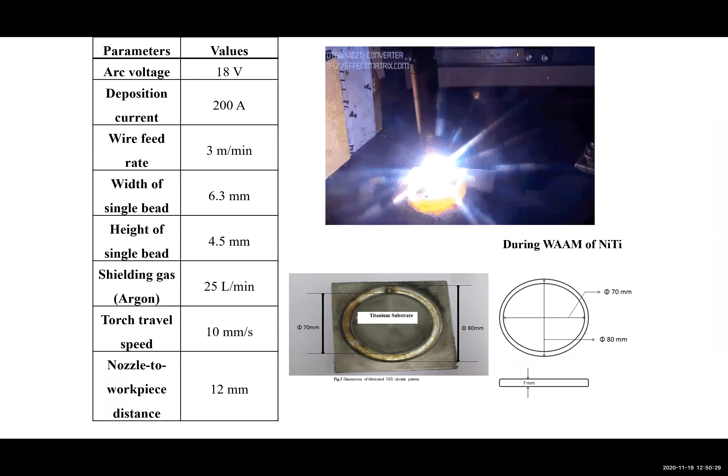So in fact, we went for a wire feed shape memory alloy. We fed the wire, and we have a precise manipulator over here. This manipulator was moving so that we can build the structure. In fact, this is a video which was taken during the fabrication. This is a kind of structure which we have developed in our lab. And you could see that the current system has a heating bed. This heating bed has a capability to manipulate, and then you can build any kind of structure with no problem. So you can manipulate your structure. That is an advantage of going for this system.

And we have a capability to build up to 30 centimeter by 30 centimeter area using this unit at a very low cost. Okay. Now comes the performance. So this is the as-fabricated NiTi structure which we have fabricated. We want to use it for this gripper. So in fact, we went for wire EDM. Using wire EDM, we diced it. So this is the pseudoelastic NiTi.

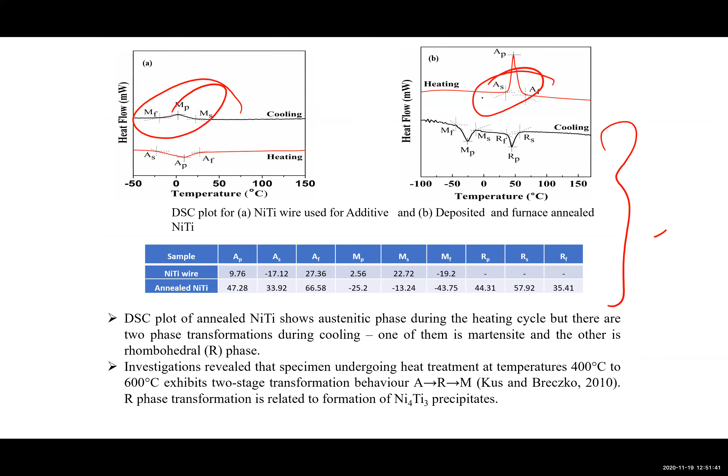Then we went for training of these martensite structures. We apply a stress to get a detwinned martensite. When you put it on a hot plate, it comes back. So basically, we went for a complete training over here, to achieve the required operation. These are some of the characterizations which we did, which you are already exposed to. Basically, I want to know the austenite phase and the martensite phase, and based on that, I can use it for my application. And we went for mechanical testing.

But the major challenge in this setup is, I am fabricating it in the form of a bulk, then dicing it into a strip, which I felt is not justifying additive manufacturing. Because the main objective of additive manufacturing, we all know, is to reduce material loss. Here it is something like additive, then subtractive, and then I am using it. So we thought, why can't we employ a system? In fact, this is the additive manufactured sample which we used. This is the recovery which we studied, almost 80% recovery achieved with the additive manufacturing system.

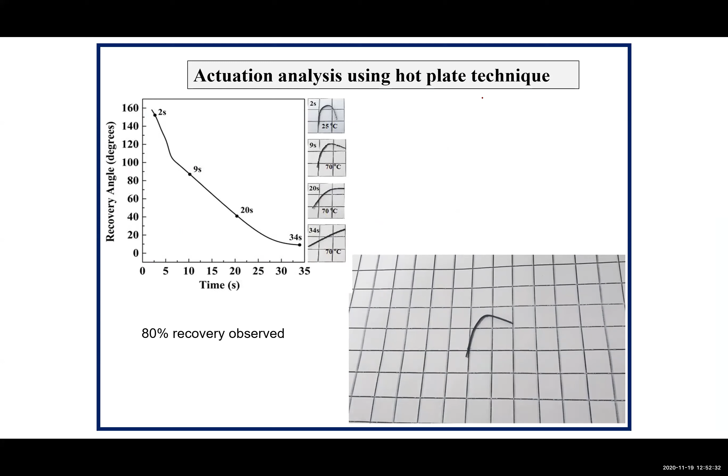So at the backside there is a hot plate. So with respect to the hot plate, we were trying to study that. Okay. So coming back to the story, first we are just doing an additive and then we are going for a subtractive. So basically it is not worthwhile to use it.

So what we thought is, why can't we make a thin layer? We attempted with this machine, but somehow this machine's capability didn't allow us to go for a thin material of around 1 mm thickness. So when we tried to probe into it, we came up with an idea. This idea is quite interesting: you use a laser.

When you use a laser on the material and go for a marking, you have a welding gun which is available. So this welding gun, wherever you have done a marking, will try to pull the energy, or concentrate the energy, in that particular region so that you can make thin sections. So this was highly interesting for us. So we thought of employing this idea for making thin shapes.

In fact, this is an attempt we made in our lab. This is a layer width of around 3.5 mm with the process parameter without marking, and we could achieve a width of around 1.8 mm after marking. So we could even achieve a thin sheet. So we went for a complete analysis. First we did a marking, and then we went for a deposition.

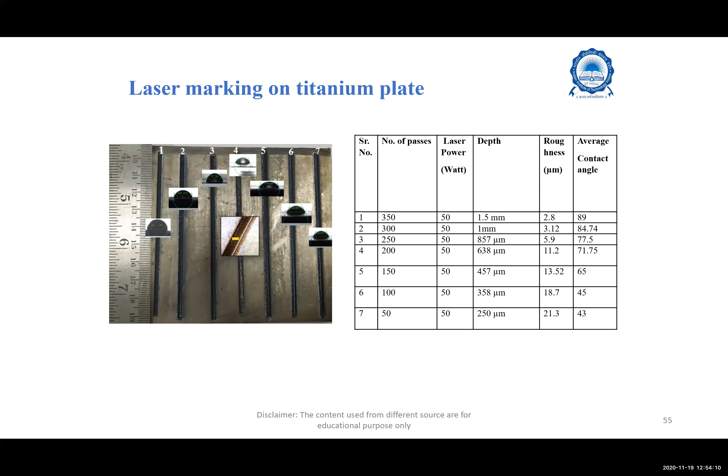So this is the laser marking which we employed. We used a 50-watt fiber laser. This 50-watt fiber laser was fed into this wire arc additive, and when you process through it, you can have a detailed deposition coming out.

So this is a contact angle measurement which we employed. This contact angle measurement helps us to understand how the wettability behavior of the system works. You have a water droplet, and through the water droplet we can study it. We went for a complete detailed temperature distribution and a complete theoretical analysis to study how the temperature distribution happens with respect to the variation in the laser processing.

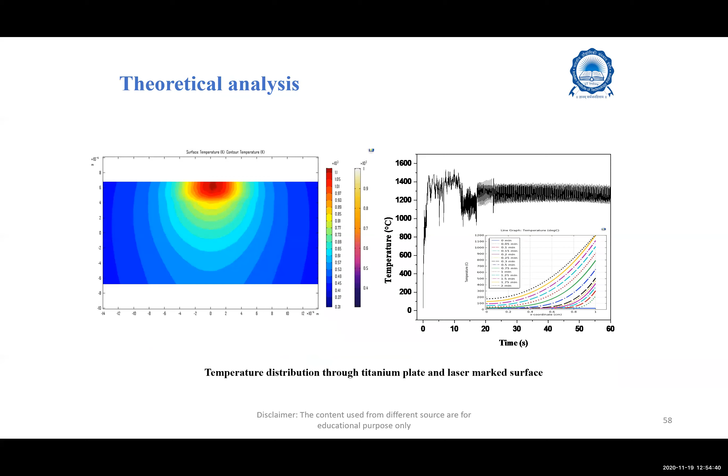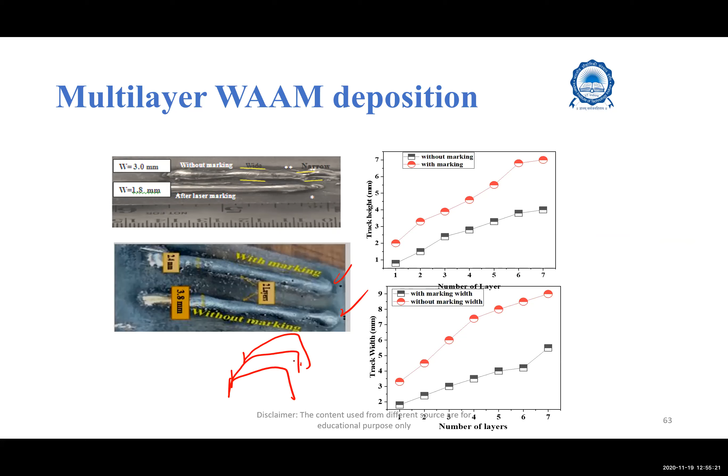So this is a WAAM sample without marking, and this is with marking. This will give you better clarity on how the surfaces were made. In fact, we built different layers, and we were also trying to see how the layers were working.

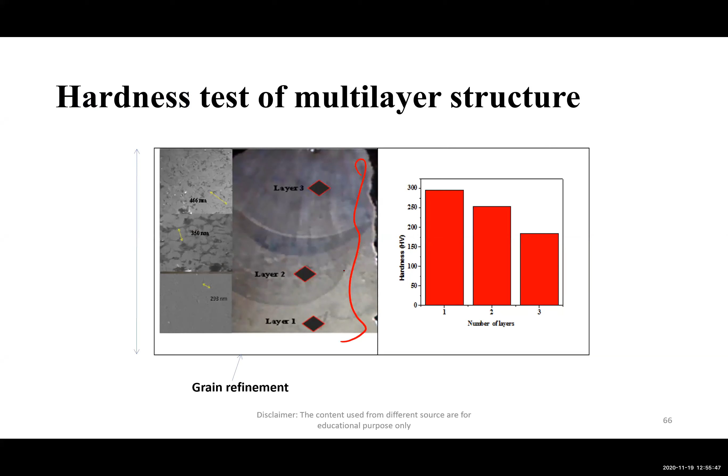We went for different layers and studied the hardness capability in detail with marking and without marking. So this is a multi-layer hardness. This is a multi-layer track which we prepared. With respect to this multi-layer track, we were pinpointing how much hardness variation there is in my system. Okay, so this is one arrangement which we made.

There is a concept called laser-based actuation. Since you are using heat for actuating your shape memory alloy, we thought, why can't we use a laser for actuating these materials so that it becomes non-contact based actuation? For example, I have a nuclear reactor. Inside a nuclear reactor, there is a relay and there is a valve. So I need a system to switch the relay circuit on and off.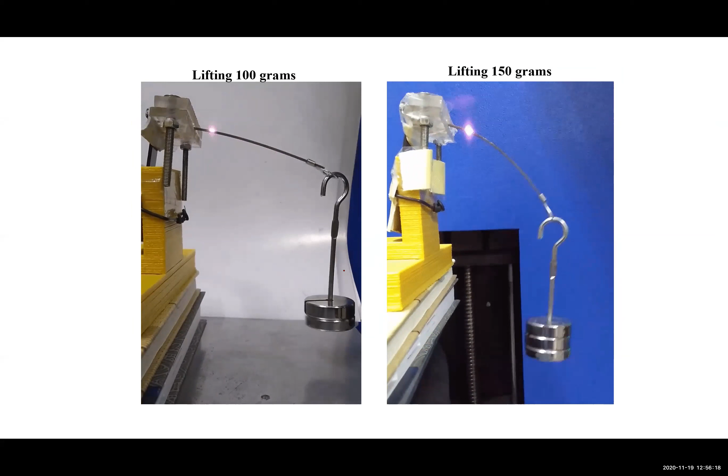So in order to switch my relay circuit on and off, I am just using my laser to heat it. When I use the laser, there is going to be a flipping arrangement, and this flipping arrangement will help me to move back. So that is the idea we had here, and by actuating it, we were able to see how things were working.

Okay, so this is a setup we made in our laboratory to study the overall life cycle analysis, because after you do non-contact based actuation, there is a chance that it may lose its property.

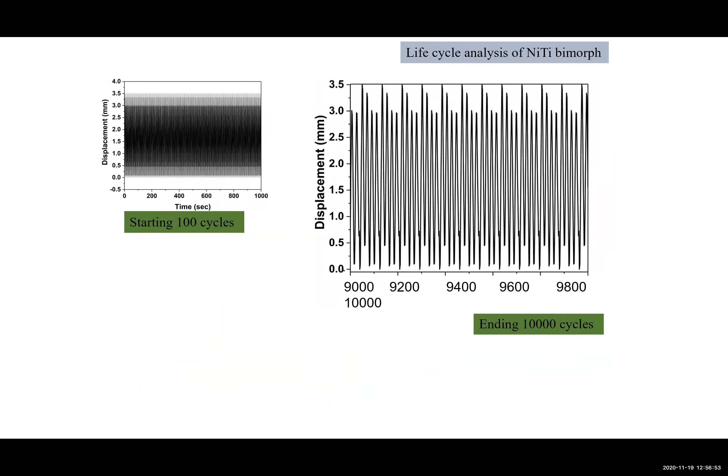Okay, so in order to test that, we took the laser actuated sample and we went for a complete actuation analysis, and we observed that the recovery ratio was not changing much. In fact, there was a change in recovery ratio from 80 to 70%, which was comfortable enough.

So the last session which I would like to talk about is, slightly pushing away the shape memory alloy, there is one concept called piezoelectric. This piezoelectric is quite an interesting area. Most of you might be aware of piezoelectrics. These are some kind of intelligent crystals. When you apply a pressure to it, you get an EMF which is generated along the sides. So this is the idea of a piezoelectric structure.

So what we are attempting is, you have a machine tool. Any machine, when it works, there is going to be a vibration. So we are going to harvest the energy from this vibration so that you can potentially make a sustainable system. So that is one idea. The second idea is we were in the process of developing a piezoelectric based Stewart platform. A Stewart platform is a type of parallel manipulator.

So basically, when you go to malls, there are some video games available where your kids sit on a bike and the bike moves. Underneath there is a platform, and that platform acts as a simulator. Okay. So now coming back to the manufacturing point of view, for example, if I have a sample like this, I want to drill a perfect hole.

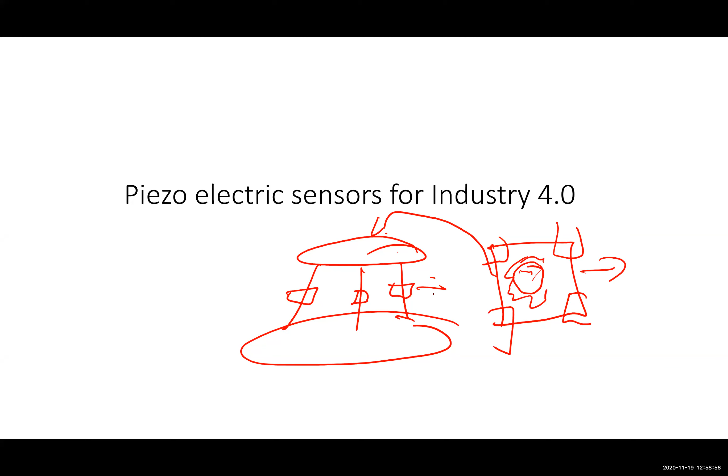When drilling is employed over here, there is going to be a vibration. Your vibration is something like this. When I give an opposite signal, then obviously you can nullify the vibration. Your piezoelectric has the capability to do that. It can take up the vibration signal and actuate an opposite vibration so that it can nullify the vibration coming out. So this is the idea we are working upon.

As far as piezoelectric is concerned, one important aspect I would like to say is that commercially available piezoelectric has lead in it, which is harmful to the environment. So normally people are not interested in using it. In fact, it is not biodegradable either. So in our lab, we have developed a biodegradable piezoelectric structure using a zinc oxide based system, making it on par with the conventional one.

In fact, I'll be showing a video where we have harvested the energy from a compressor. It's a kind of sticker arrangement that we make, and we have just pasted it on a compressor. This is a simple arrangement where a person is tapping and trying to harvest the energy. In a similar fashion, we have fabricated this in the form of a sticker and pasted it on a compressor. When the compressor vibrates, we can harvest the energy. That video I'll be showing to you.

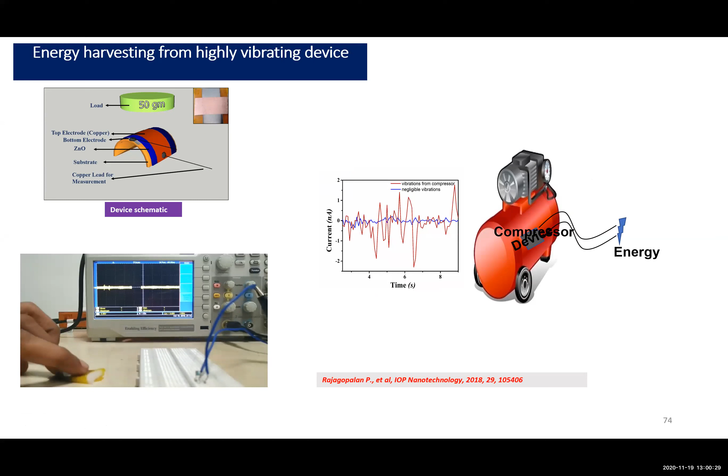And this is a small burglar alarm which we made. This video is not working. In this, we have made a mat kind of arrangement. When someone steps on this mat, it automatically gets energized and creates an alarm. So you don't need to connect it to a battery.

And this is a kind of fluttering device. Basically you have a flag kind of arrangement. In this flag, we have integrated piezoelectric structures. When the flag flaps, you can harvest the energy. I'll be showing you this video. And this is a kind of self-energized smart gas purging system. However much you stamp on it, you can harvest the energy and use it for your application. Before closing, I would like to show a small video about our laboratory and some of the experiments we have done.

Hope you are able to see my video. Yes? Are you able to see my video? Sir, not well, sir. Okay, 1 minute. Is there any? The page has been opened, sir. Okay. Now, are you able to see a window?

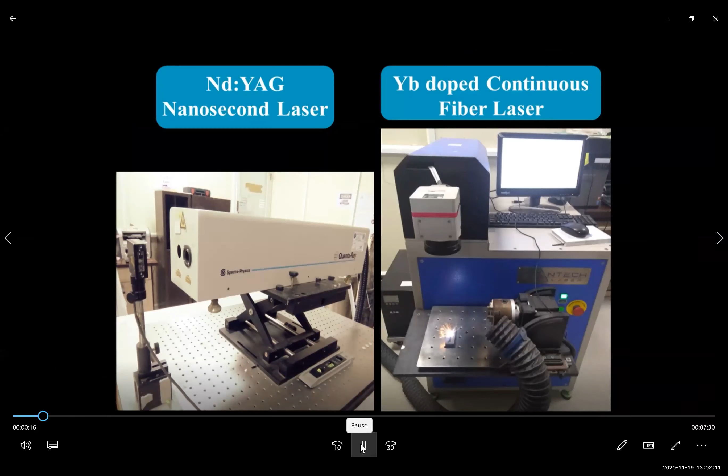Yes, sir. Okay, good. So these are some of the facilities which we have. So we have high laser facilities, which are of high power as well as low power. Recently, we have also developed a micro 3D printing unit. In addition to that, we also have complete characterization facilities like DSC, differential scanning calorimetry, temperature-controlled UTM. And then we have strong thin film facilities.

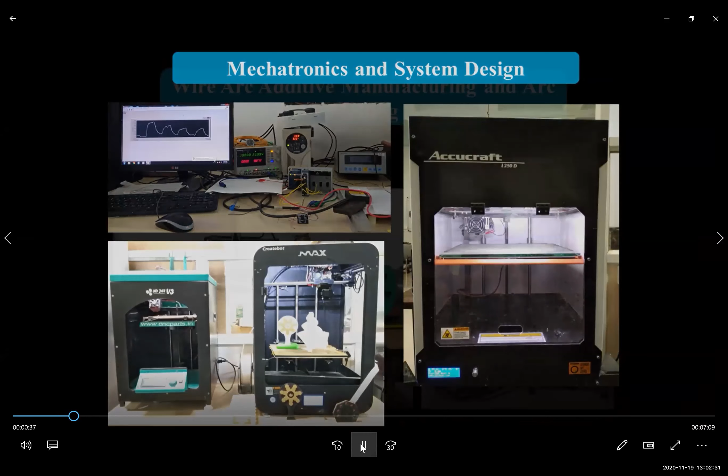So these are some of the additive manufacturing units which we have developed. So this is a metal additive manufacturing unit which we have developed in-house. These are some of the structures which we have fabricated in our lab. In fact, I would say in an Indian context, we are the first to develop additive manufacturing dedicatedly for shape memory alloys. We have a capability to print shape memory alloys over around a 30 centimeter by 30 centimeter area for any kind of application, whether it is pseudoelastic or any other kind.

So this is how our additive manufacturing unit works. Basically, it's completely integrated inside a glove box, so that you can have control over the impurities. Second, here we have kept a hot plate which has the capability to heat up to 650 degrees Celsius. When you can heat up to 650 degrees Celsius, you can have refinement in your granules, and you can have control over your crystallized structures.

Okay, so this is a shape memory alloy. In fact, welding of shape memory alloy is a challenging task, which we have performed in our laboratory using the friction stir welding concept. Using this friction stir welding, we are actuating it and trying to see its behavior. This is a complete 3D printer structure which we have developed in our lab. And this is a laser displacement sensor which is used for studying the life cycle behavior.

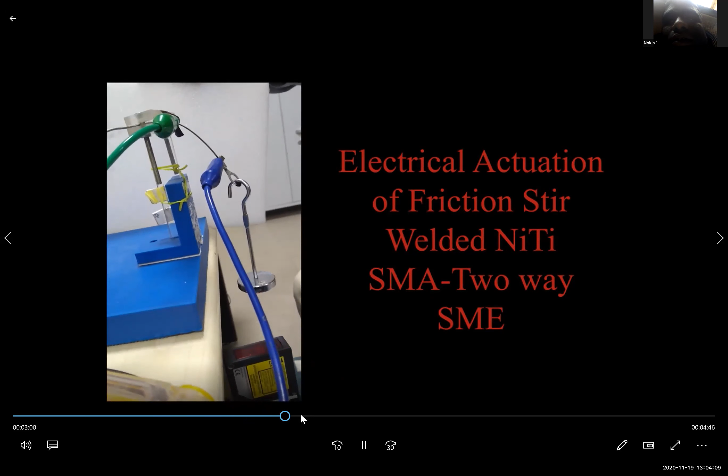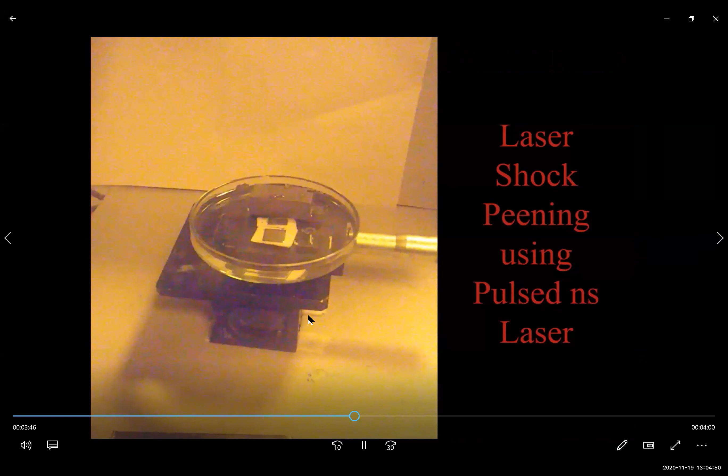So this is a setup for laser shock peening, basically to induce a compressive residual stress. This is a kind of shape memory alloy embedded composite structure. This shape memory alloy composite structure we have developed for some of the handheld missiles for DRDO. We have transferred this technology to DRDO for some kind of maneuvering applications.

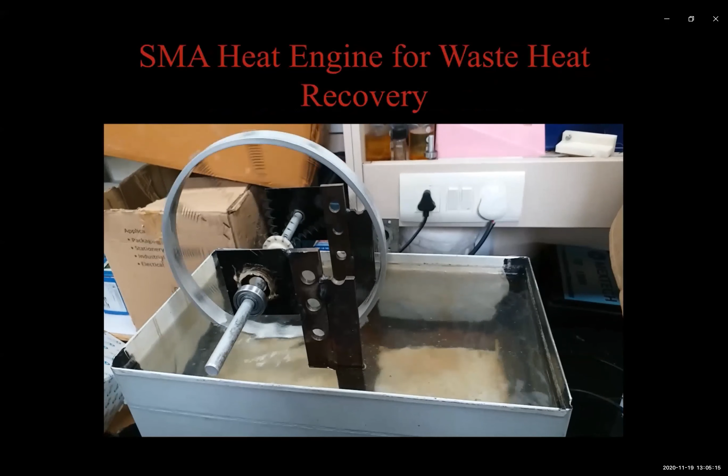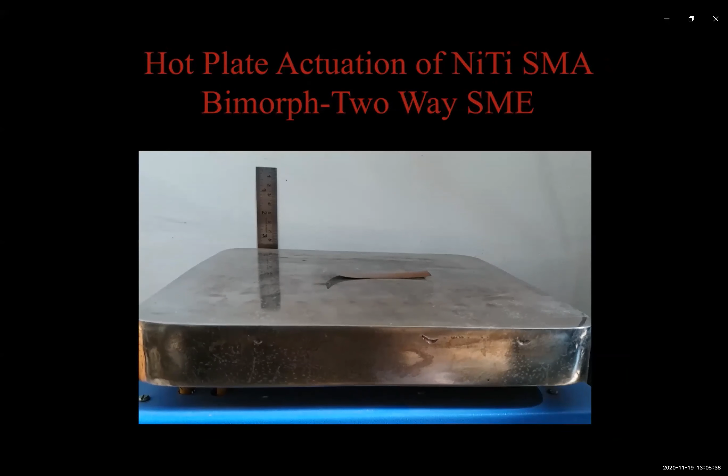So this is called an SMA heat engine, which has the capability to harvest energy in a completely hot environment. It comes under the category of perpetual motion. This is called shape memory alloy bimorphs, which we have developed in-house. Basically, these shape memory alloy bimorphs can act as an actuator for some kind of soft robotic systems. We have the capability to fabricate these bimorphs on the order of 1 meter by 1 meter area. If any of you are interested, I can prepare it and send it to you for experiments.

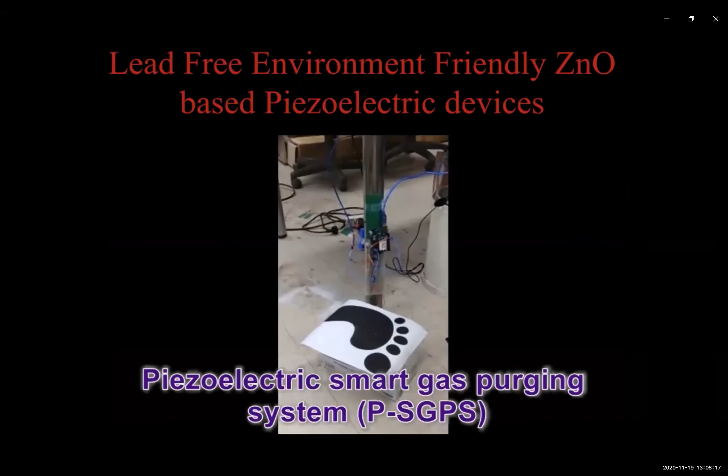So this is a lead-free piezoelectric structure which we have made; it's a kind of self-energized system. However much you stamp on it, it harvests the energy, and that energy is used for this reaction process. Here is one of our research scholars who has developed this structure. His name is Rajagopalan Pandey. He is stamping on it, and he is doing the reactions.

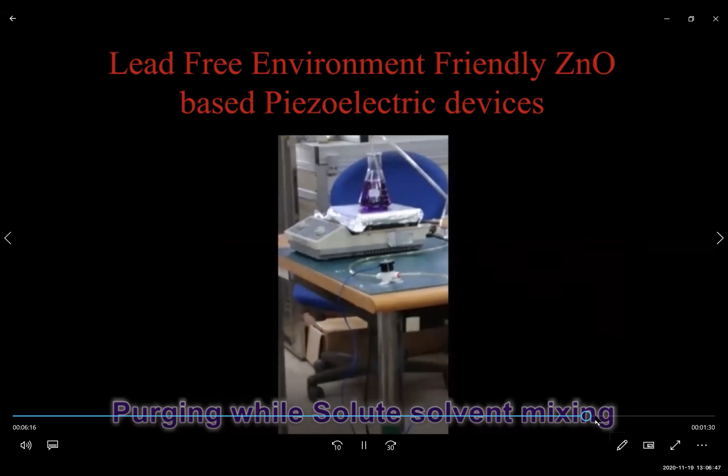Okay, so with this, I would like to close my lecture. I'm free to answer any kind of queries or questions.